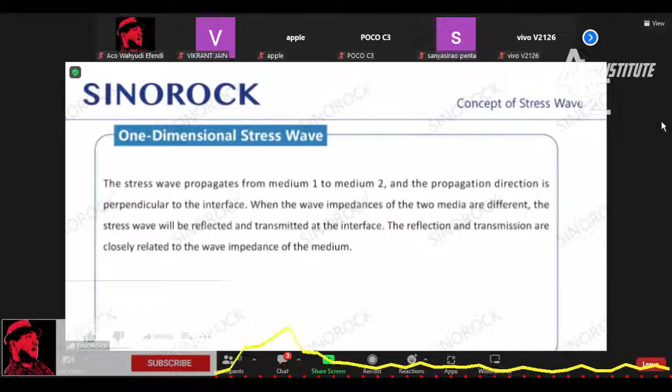Generally speaking, when we do experiments or tests, when the stress wave propagates from medium 1 to medium 2, the direction of stress wave propagation is often perpendicular to the interface of the two media. So when the wave impedance of the two media is different, the stress wave will reflect and transmit at the interface, and the reflection and transmission are closely related to the change of the wave impedance of the media.

When the rod top is knocked, we can obtain the propagation law of stress wave in the rod by analyzing the speed response of the rod top. The distribution of the difference of wave impedance in the rod body can be determined by the variation characteristics of the velocity response time history curve.

According to some formulas we derived above, we can directly relate the reflected wave velocity to impedance and incident wave velocity, including the relationship between transmitted wave velocity and incident wave velocity and impedance. That is, the reflected wave velocity is equal to the negative incident wave velocity, multiplied by impedance 2 minus impedance 1, divided by impedance 1 plus impedance 2. The transmitted wave velocity is the sum... it equals the incident wave velocity multiplied by twice the impedance 1, divided by impedance 1 plus impedance 2.

Let's take a closer look at the laws of stress wave propagation. We have seen some laws of stress wave propagation in the rod. So how to introduce the stress wave into the low-strain integrity testing of foundation piles? We need to make some assumptions about the foundation pile.

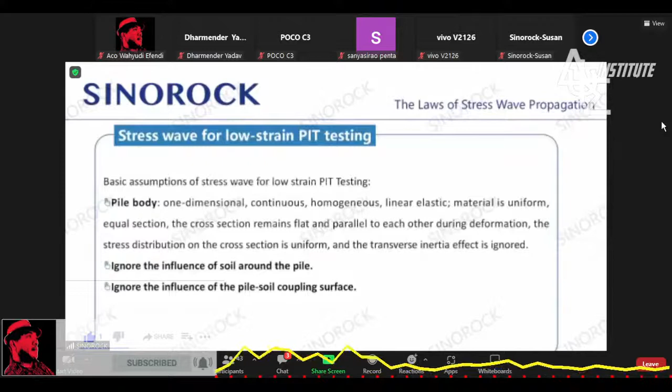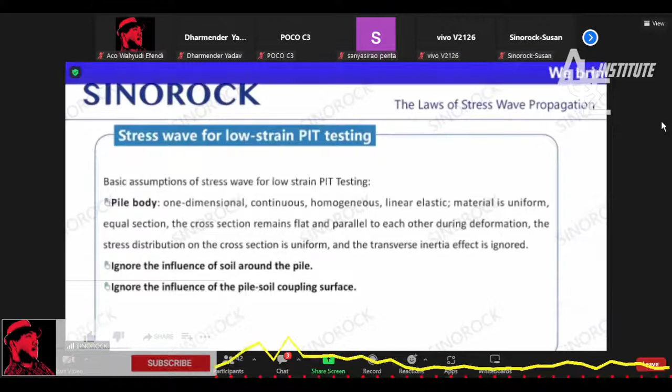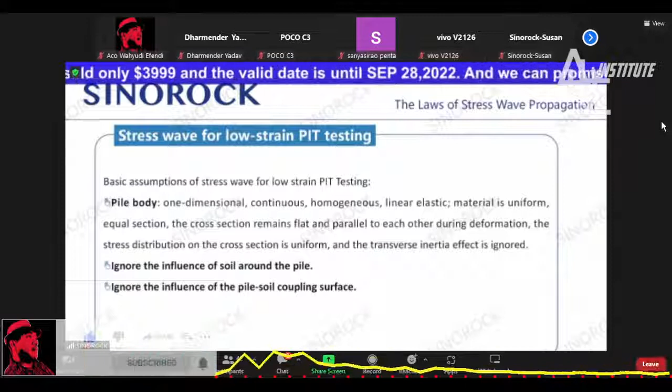First, the pile body is one-dimensional, continuous, homogeneous and linear elastic. That is to say, the material is uniform and equal in cross-section, and the cross-section of the stress wave in the deformation of the pile body remains plane and parallel to each other, that is, a plane wave. The stress is uniformly distributed on the cross-section, ignoring the lateral inertia effect of the pile body. In addition, the influence of the soil around the pile on the pile body and the influence of the pile-soil coupling surface are ignored.

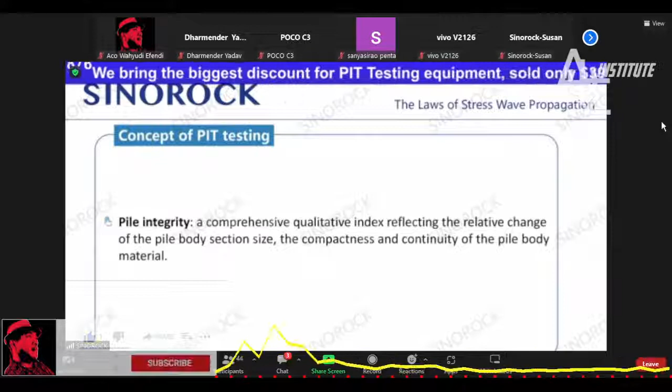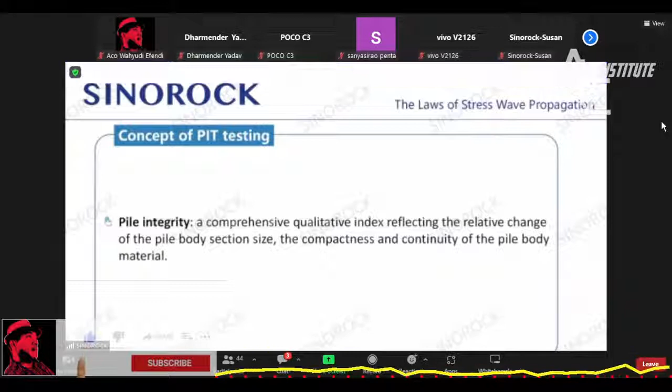Then we will talk about the concept of pile integrity. Pile integrity is the relative change of pile section size and the combination of pile material compactness and continuity. What is the relative change of section size, and how can we relate it to wave impedance? The relative change of section size is the change of A. The compactness and continuity is the change of C. Whether it can effectively propagate is actually a comprehensive indicator of whether the wave impedance is uniform.

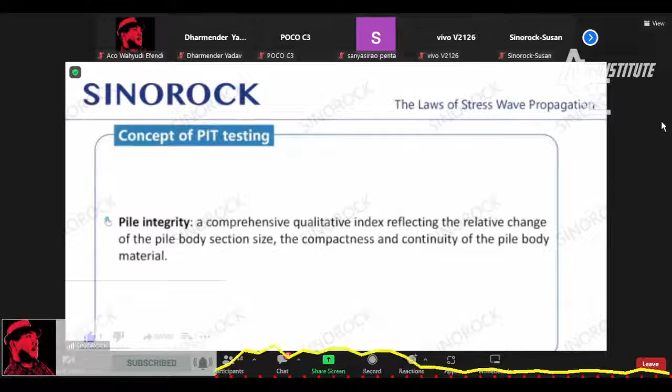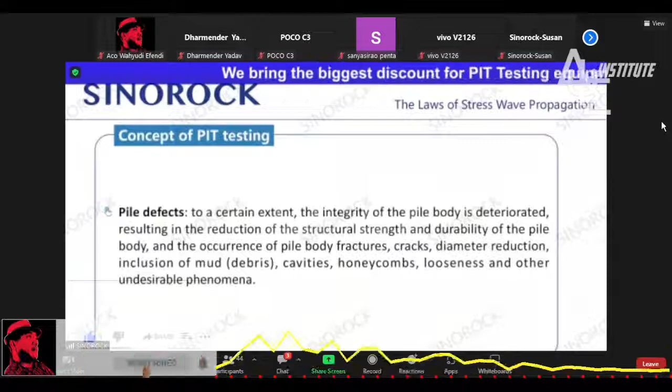What is the definition of pile defect? It will deteriorate the integrity of the pile body to a certain extent, causing the reduction of the structural strength and durability of the pile body. Generally speaking, we often encounter that the pile body is broken, with cracks, shrinkage, mud and debris, cavities, honeycombs, looseness and other undesirable phenomena in the pile body. Pile defects are a general description of this phenomenon.

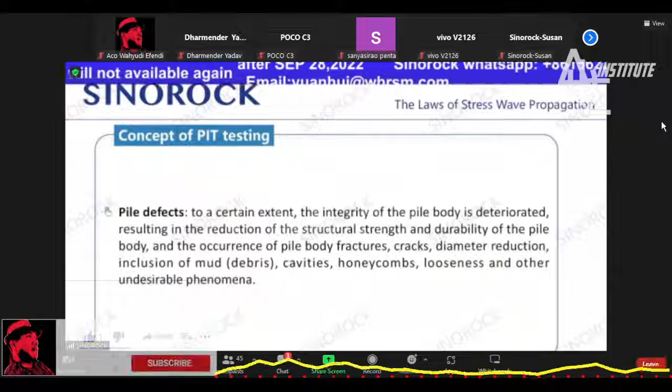The low-strain method is a testing method that uses low-energy transient excitation at the top of the pile, measures the velocity time history response curve at the top of the pile, and evaluates the integrity of the pile body through time domain analysis or frequency domain analysis of wave theory.

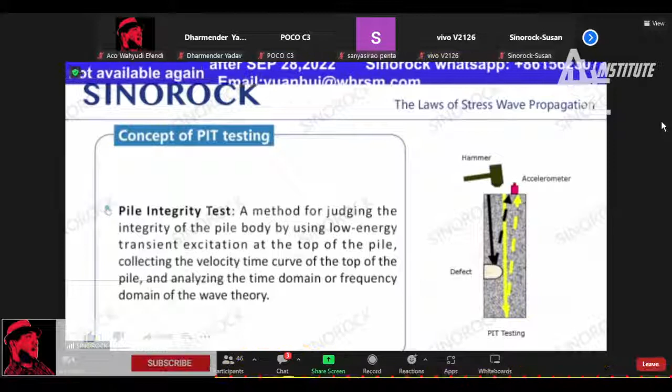In the figure on the right, the stress wave generated by low-energy transient excitation at the pile top propagates along the pile body, and the stress wave meets the discontinuous or defective position in the pile body to generate a reflected wave. We receive its signal through the sensor installed on the pile top, and then analyze the phase, amplitude and other indicators of this signal through the stress wave method, and then analyze, judge and evaluate the integrity of the pile body. This is the detection principle of the low-strain method.

Low-strain PIT testing is not suitable for all integrity testing, and has a certain scope of application. In some cases, low strain will have a good testing effect, while in some cases it is impossible to judge. Let's take a look at the scope of application of the low-strain method.

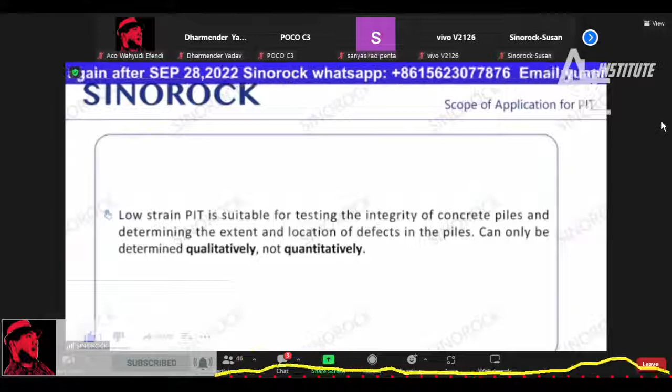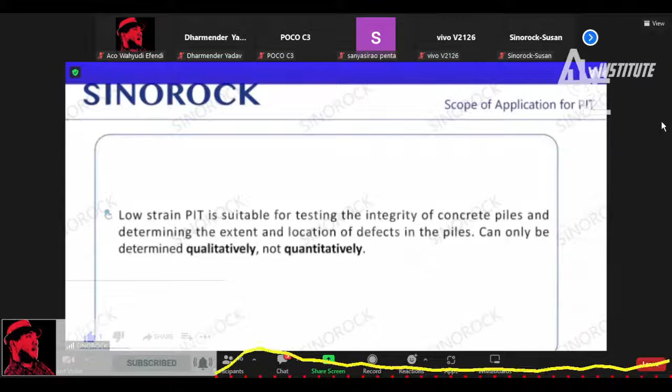The low-strain method is applicable to detecting the integrity of the pile body of concrete piles, and judging the degree and location of pile defects. But it can only be judged qualitatively, not quantitatively.

The theoretical basis of low strain is the model of one-dimensional linear elastic rod. Therefore, the ratio of the slenderness ratio of the tested pile, the pulse of transient excitation, and the wavelength of the effective high-frequency component to the transverse dimension of the pile should not be less than 10, which is the requirement of one-dimensional linear elastic rod model.

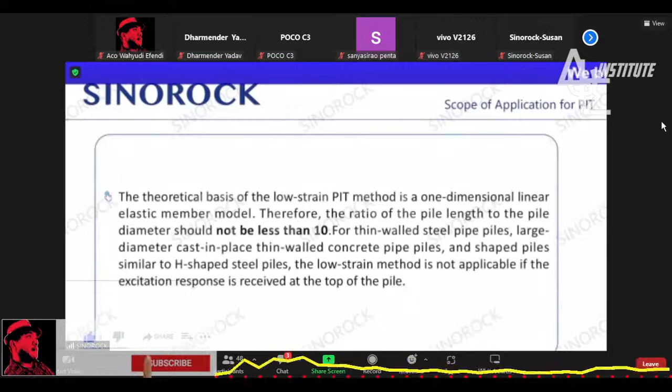In addition, it is also required that the designed cross-section of the pile body should meet the basic rules. The one-dimensional theory also requires that the assumption of plane section is valid when the stress wave propagates in the pile body. Therefore, for special-shaped piles, such as thin-walled steel pipe piles, large-diameter cast-in-situ thin-walled concrete pipe piles, and steel piles similar to H-shaped piles, if we use the excitation response to receive on the top surface of the pile, the low-strain method is not applicable.

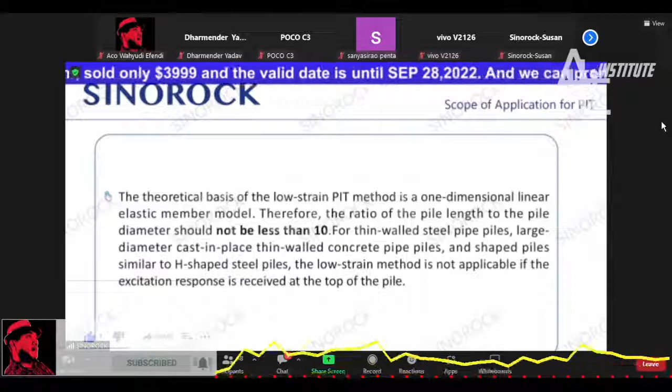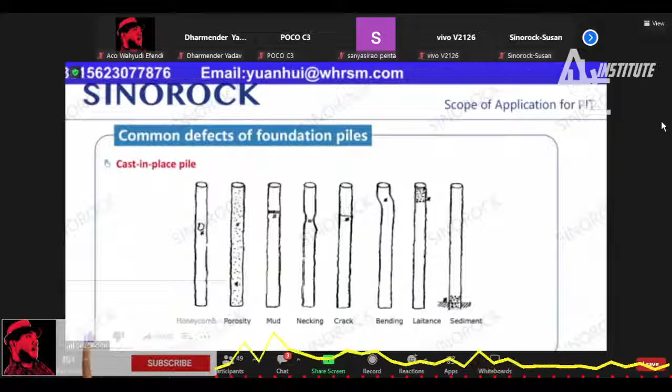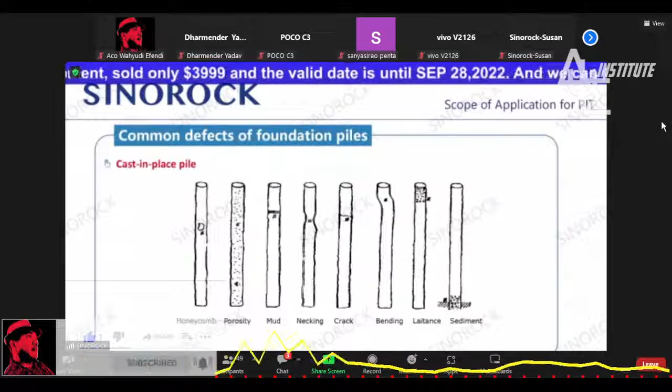Let's look at some common defects. What are the common defects of cast-in-place piles on the construction site? Honeycomb: the whole pile is loose. Some part of the pile body has mud inclusion and diameter reduction. The pile body has cracks, the pile is bent due to hammering, poor quality or other reasons, as well as the laitance on the top surface of the pile and some sediment on the bottom surface of the pile.

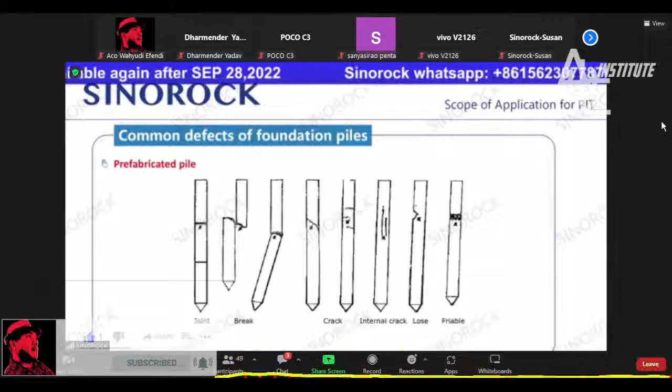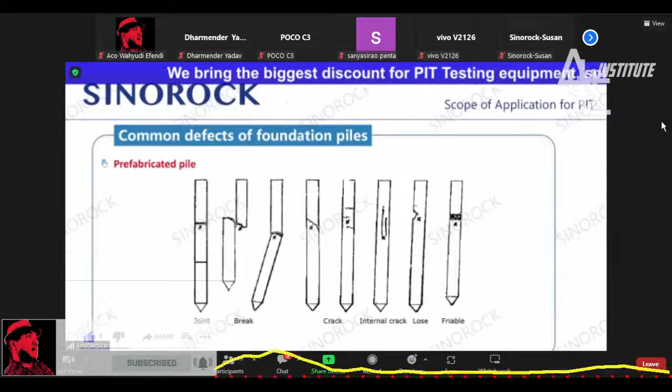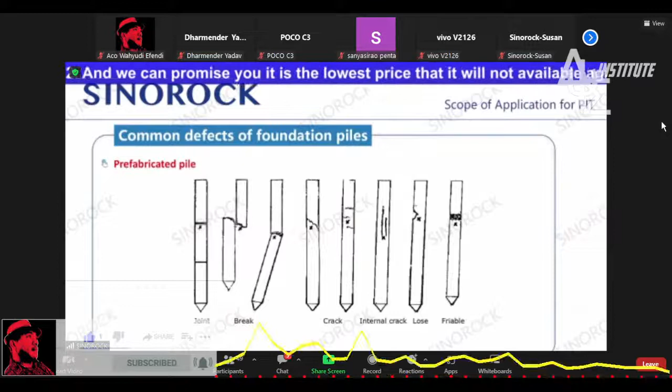What are the common defects of precast piles? The quality of pile connection between multi-section piles, the fracture during pile driving. Cracks, horizontal or vertical cracks. The condition that the pile body is damaged by hammering. The pile body is not smooth, and the pile body is loose during prefabrication are common.

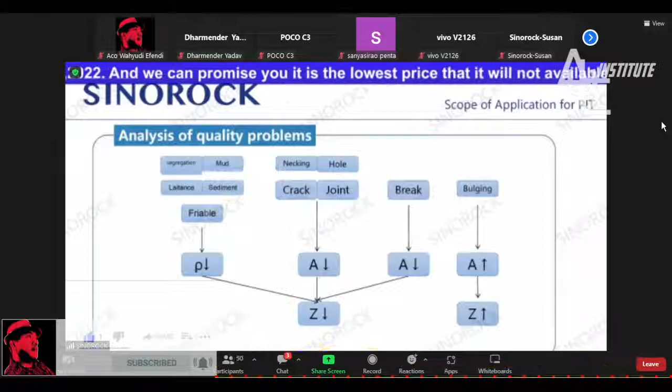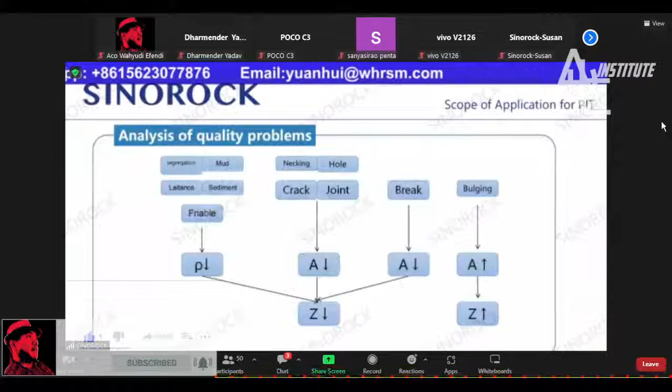We analyze these defects as quality problems. Segregation, mud inclusion, laitance, sediment and looseness will all cause density reduction. The reduction of diameter, holes, cracks, including joints, will cause the reduction of cross-sectional area. The fracture of pile body can be considered as the cross-sectional area being about 0. These defects, except expansion, will basically cause the wave impedance to decrease, and the expansion will cause the wave impedance to increase due to the increase of the cross-section.

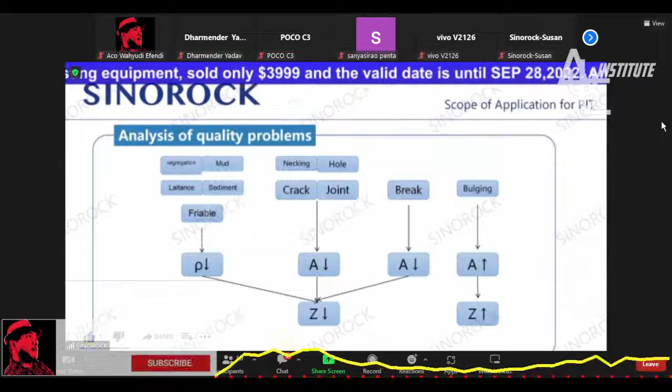According to these, we can know that most defects are wave impedance reduction. As we have said before, for the pile with reduced wave impedance of the pile body, the reflection in the same direction will occur at the location of the defect.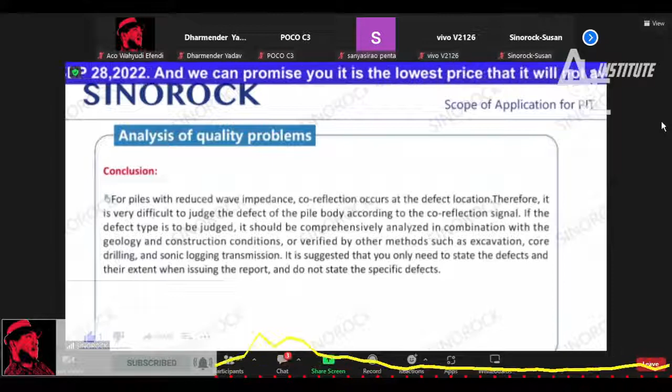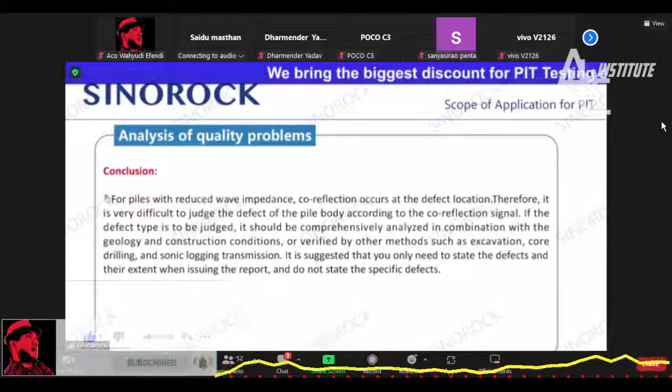Can we deduce it backwards? It is actually very difficult to judge the nature of the defect of the pile body according to the reflection in the same direction. If the nature of the defect is to be judged, it should be comprehensively analyzed in combination with the geological construction conditions, or verified by excavation, core drilling, acoustic transmission and other methods.

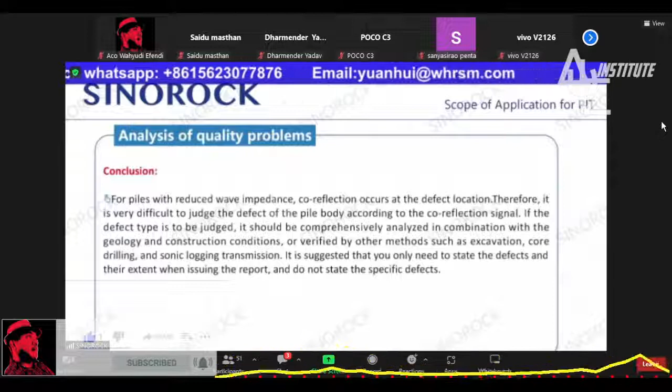Therefore, it is suggested that when you issue the report, you only state the defect and its degree, not the specific defect, because without verification, it is difficult to accurately analyze the nature of the defect, and sometimes we are faced with the combination of multiple defects.

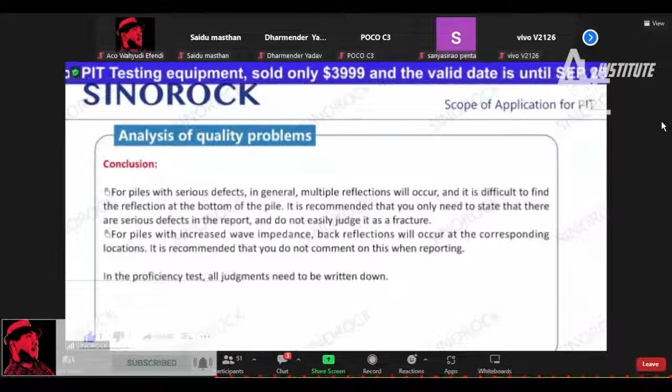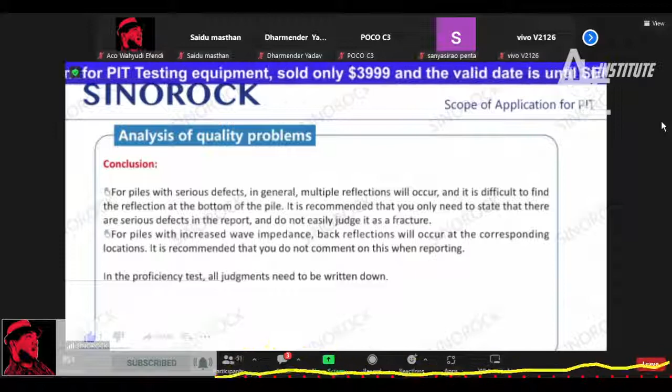We can make some conclusions about defects. Piles with serious defects generally produce multiple reflections, so it is not easy to find the reflection at the bottom of the pile. That is, it is difficult for the stress wave to transmit downward at the location of the defect. Therefore, it is recommended that when you issue the report, you only state that there are serious defects at the location of the defects, and do not easily judge it as fracture. I will give you an example in the detection technology section.

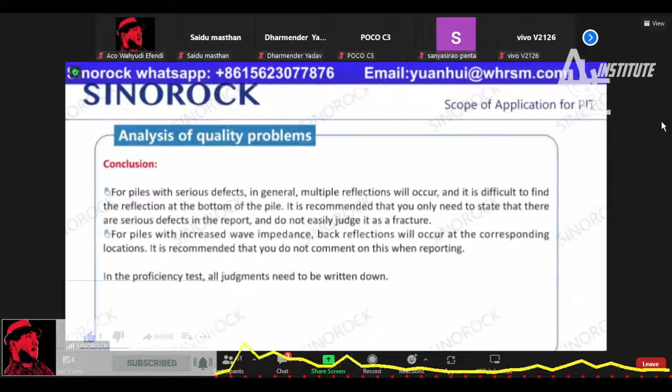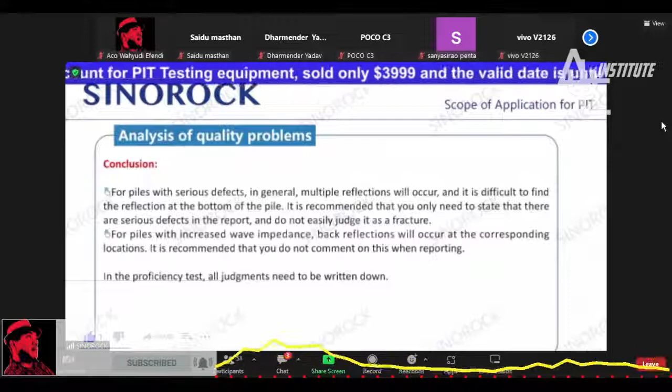When the wave impedance of the pile body increases, some reverse reflections will occur at the corresponding positions. Most of the piles are mainly under pressure, so the increase of wave impedance is helpful to the bearing capacity. Therefore, in practice, it is recommended that you do not evaluate the piles with increased wave impedance when issuing the report.

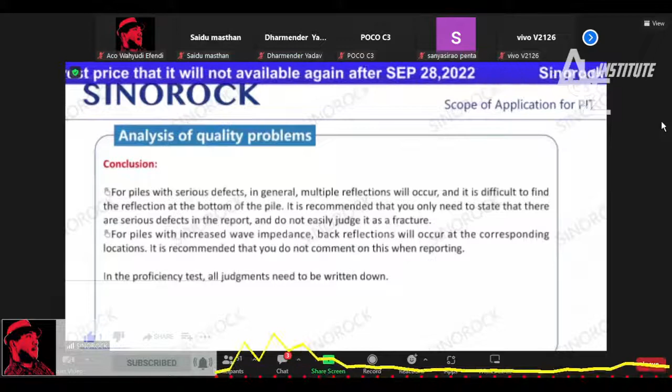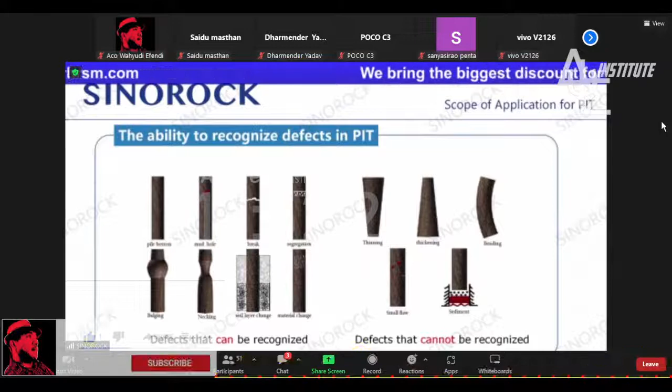Next, let's take a look at the identification ability of low-strain PIT method for defects. What defect can be identified? The pile bottom changes greatly, and the impedance changes greatly due to mud inclusion, cavity, break, segregation, bulging, necking, soil layer change, and material change in the pile body.

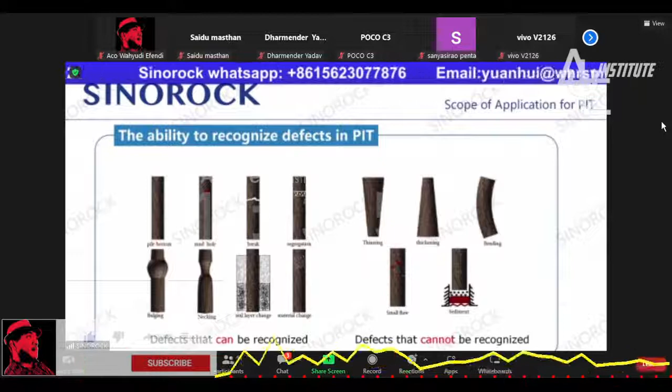The defects that can be identified on the left have obvious changes in wave impedance, and those on the right are more difficult to identify, such as thinning, thickening, bending, small defects and pile bottom sediment. The first one that is difficult to identify is the gradual process of area wave impedance. The low-strain PIT method can test some abrupt phenomena, rather than gradual phenomena. Gradual changes are difficult to reflect in low-strain PIT test.

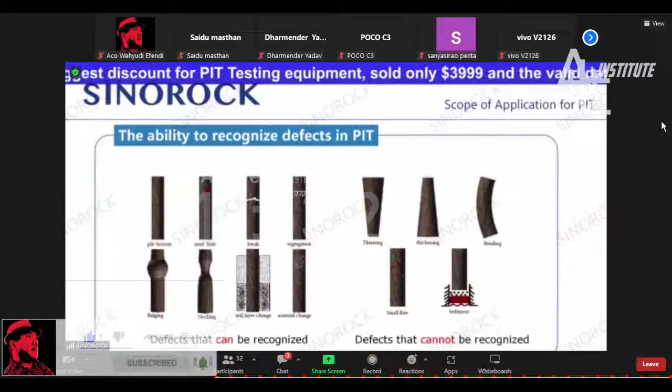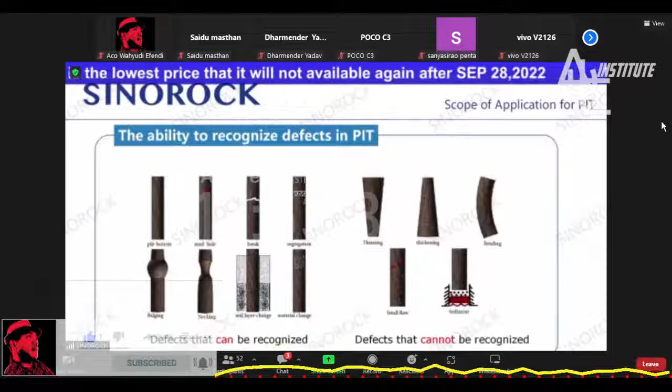The second is a small defect. The key is whether the size of the excitation frequency can distinguish this defect. The sediment at the bottom of the pile is also a defect that cannot be identified with low strain.

Previously, we introduced the principle of low strain testing to you. Now let's take a look at the low strain detection system.

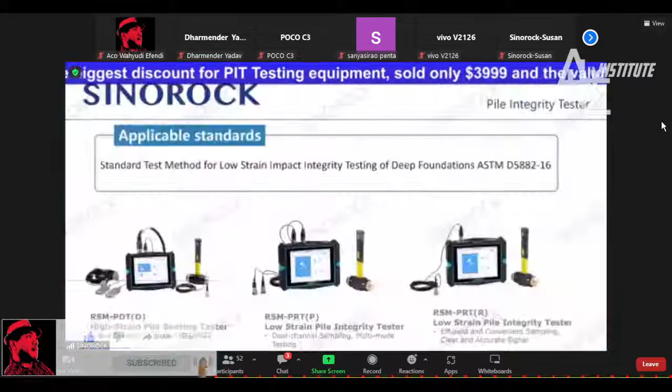The current PIT testing instrument, no matter which specification, is basically attributed to the relevant provisions of the current industry standard, ASTM D5882-16. What are the RSM series low-strain PIT devices of Sinorock?

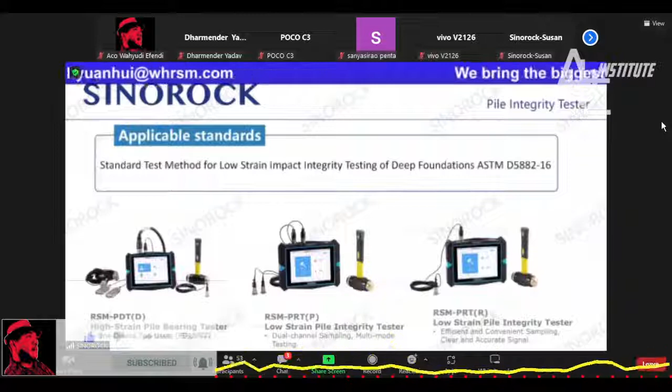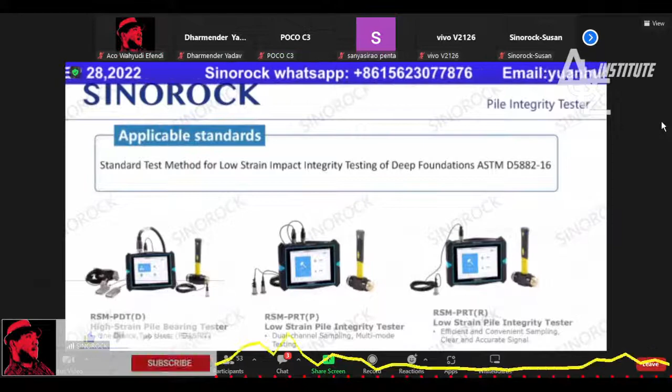In the figure below, RSM PDT-D high-strain pile bearing tester is on the left. RSM PRT-P low-strain pile integrity tester with dual channel is in the middle, and a single channel, RSM PRT-R low-strain pile integrity tester, is on the right.

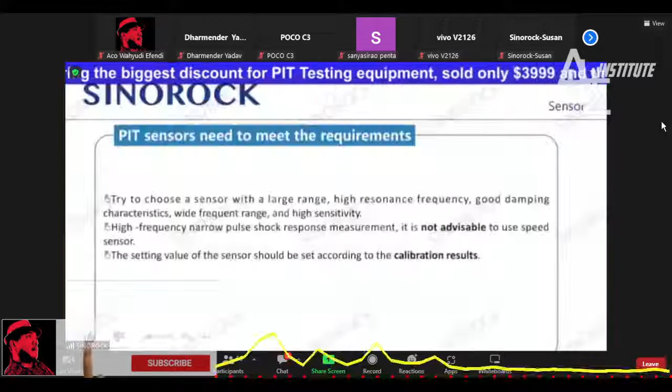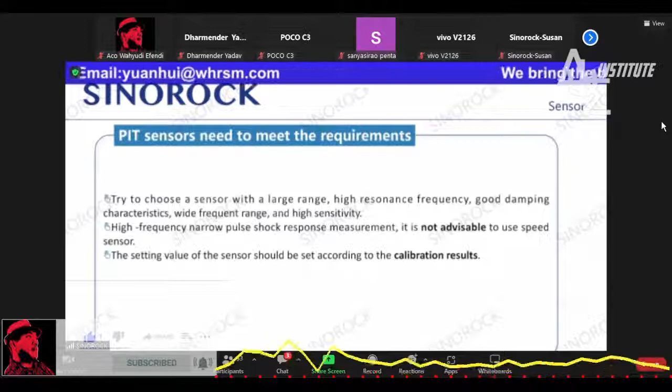What types of sensors are common in low-strain testing, and what are the requirements? We should try to choose sensors with wide range, high resonance frequency, good damping characteristics, wide frequency response range and high sensitivity. High frequency with narrow pulse signal is often used for signal recognition of shallow layer measurement, and it is not suitable to use a speed sensor.

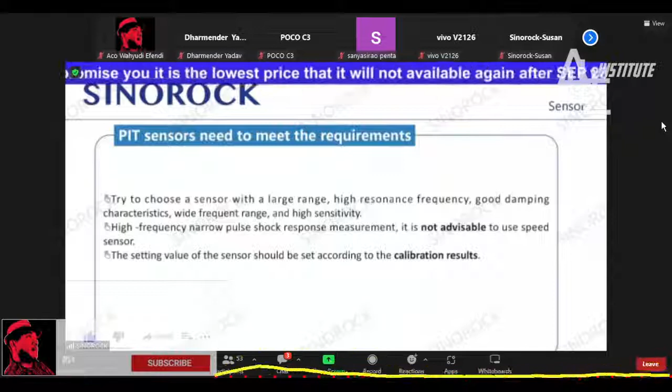In addition, it must be noted that the sensor should be set according to the metrological identification or calibration mechanism, because the moving speed of the particle is converted through sensitivity.

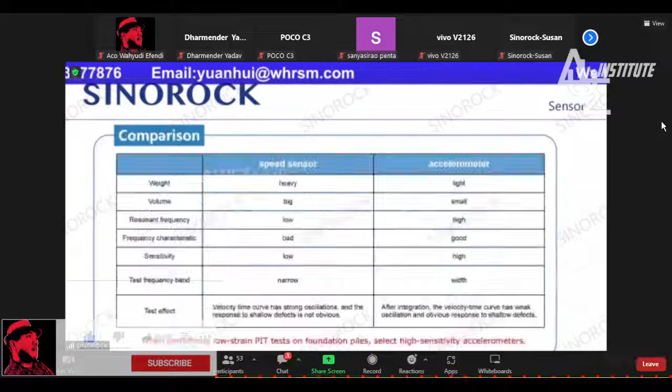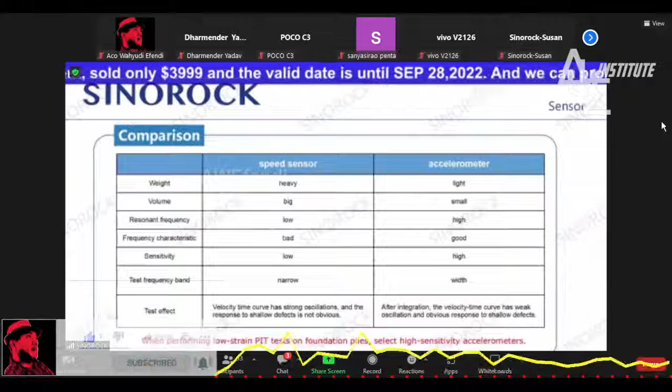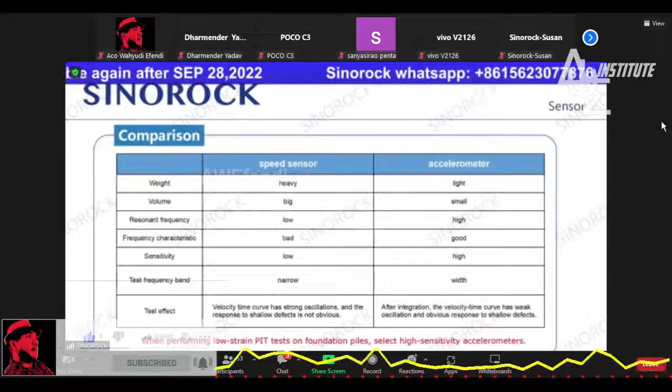I put the speedometer and accelerometer here and made an index comparison. From the perspective of weight, the speedometer is heavier and larger, so its resonant frequency is low, and its amplitude frequency characteristics, phase frequency characteristics, including sensitivity, are worse than those of the accelerometer, including the test frequency band.

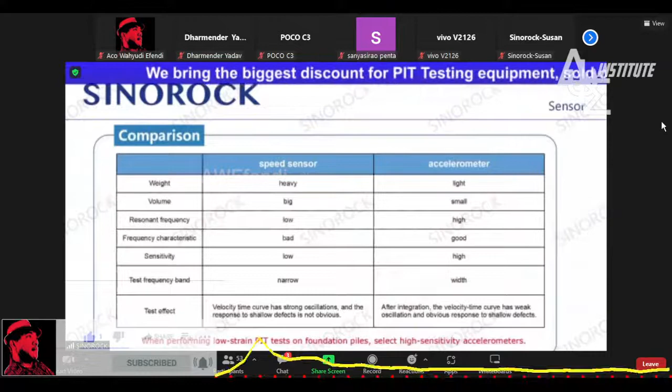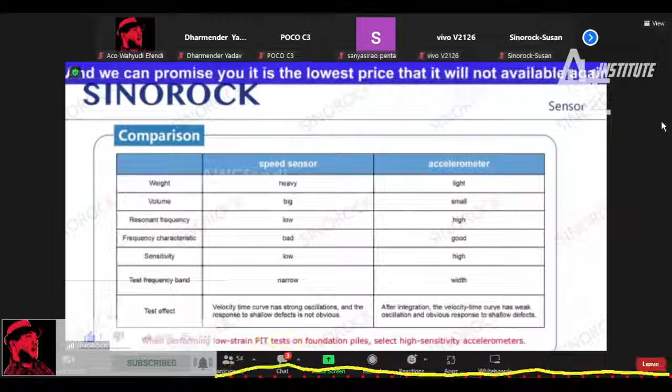So from the actual effect of the test, we have some general understanding. If we use a speedometer to measure the velocity time history response curve, its oscillation is relatively strong, and the shallow defects are not obvious on the signal curve we collected.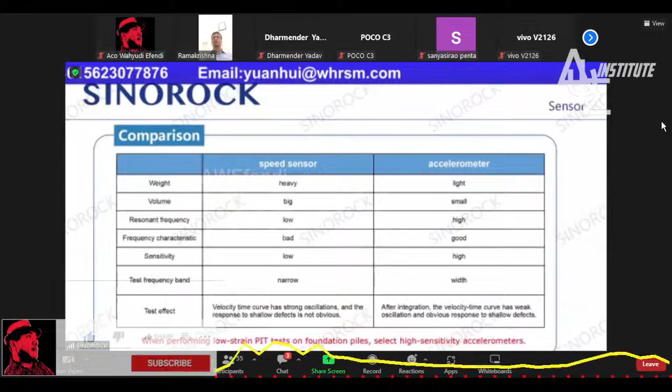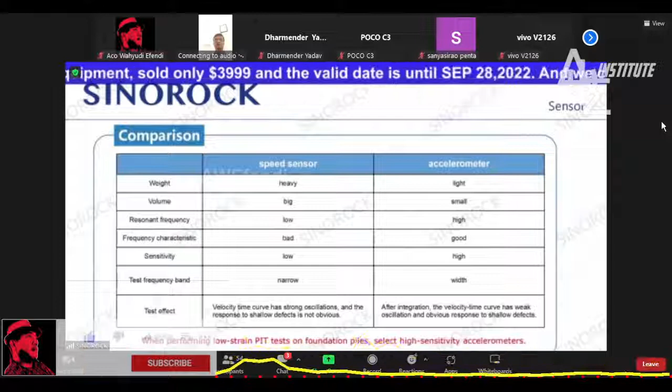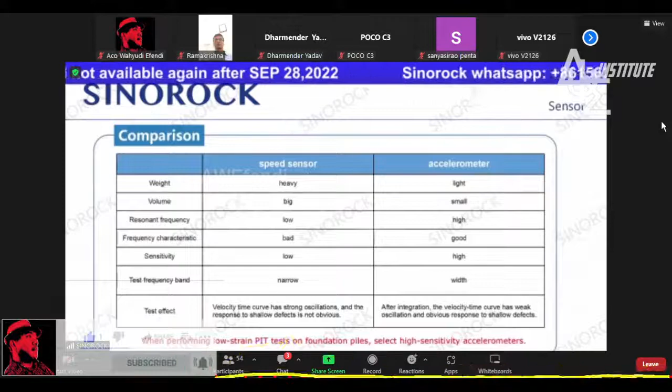However, because the accelerometer collects the acceleration signal, it can only be transformed into the velocity time history response curve we want to analyze through integration. Coupled with its good performance, the oscillation seen on the velocity time history curve is relatively weak, and the response to shallow defects is relatively obvious.

This is also the reason why it is recommended to choose high-sensitivity accelerometers as much as possible when testing the low-strain reflected wave of foundation piles according to various specifications.

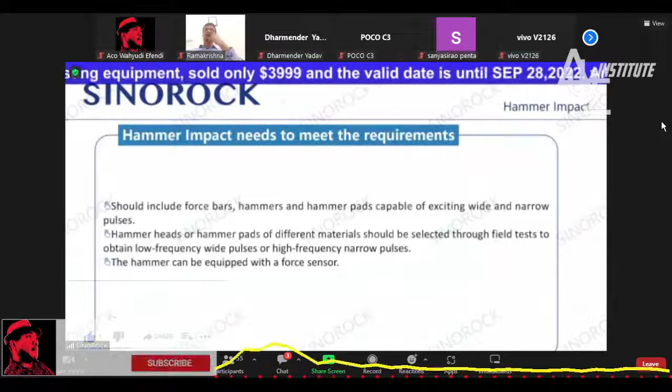There are several types of hammering impact. What requirements should excitation equipment meet? The equipment for transient excitation shall include force bars, hammers and hammer pads that can excite wide and narrow pulses. According to the test purpose, the wide pulse is mainly aimed at the pile bottom, and the narrow pulse is mainly aimed at the shallow defects of the pile body. So it is necessary to equip with corresponding appropriate force hammers, force bars or hammer pads.

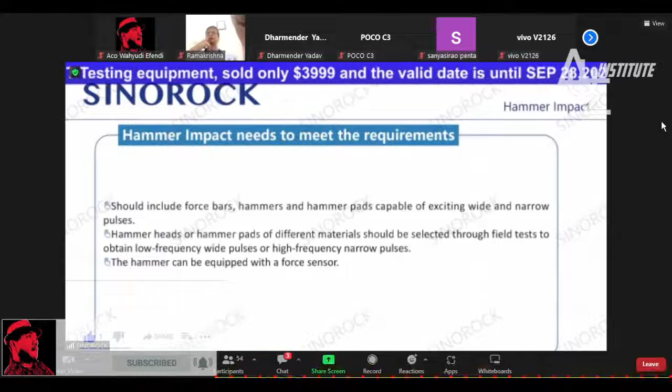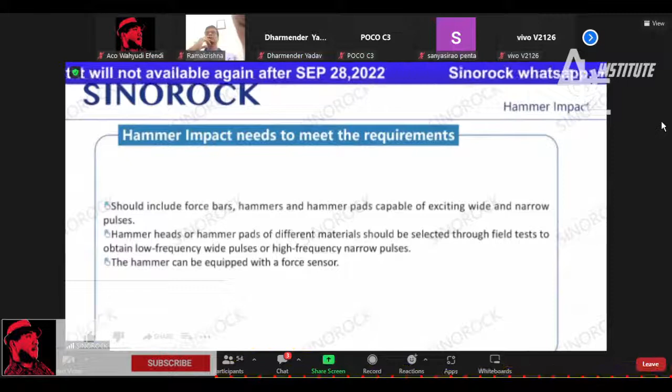However, the hammer and hammer pad need to be selected through field experiments. The choice of hammer is not only related to the pile, but also related to the soil around the pile and other geological conditions, whether the stress wave meets the requirements, and whether it can spread to the bottom of the pile. There is no very empirical law, so it can only be evaluated and judged through field experiments.

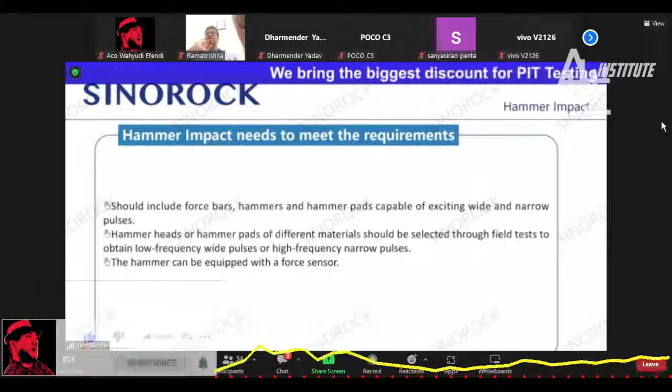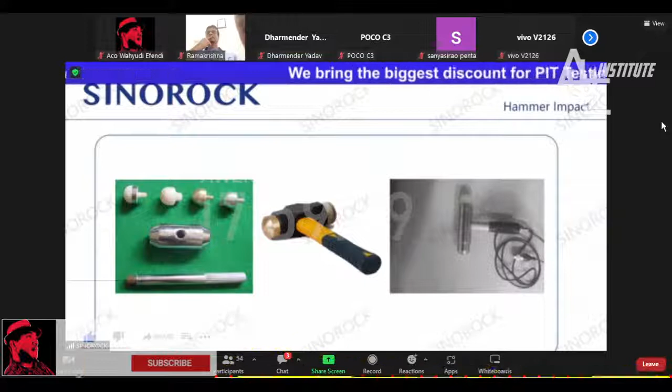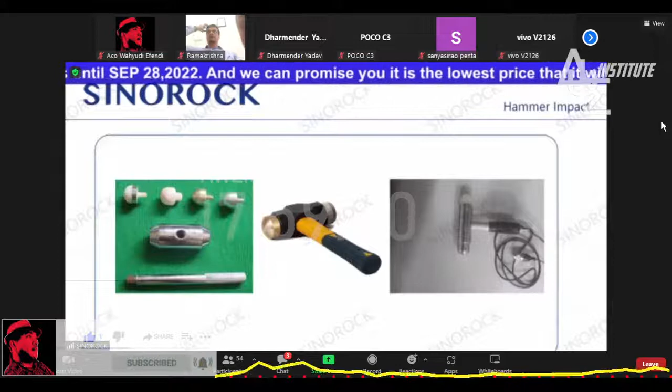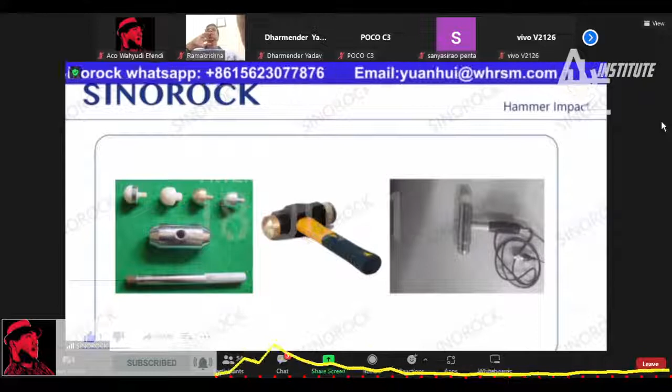On the far right is the hand hammer with the accelerometer installed on the hammer. It can't be very big, because its main purpose is to measure the defects of the shallow part of the pile, so it's not necessary to use a big hammer to test. This is mainly for the transient response method test of the dual-channel low-strain instrument.